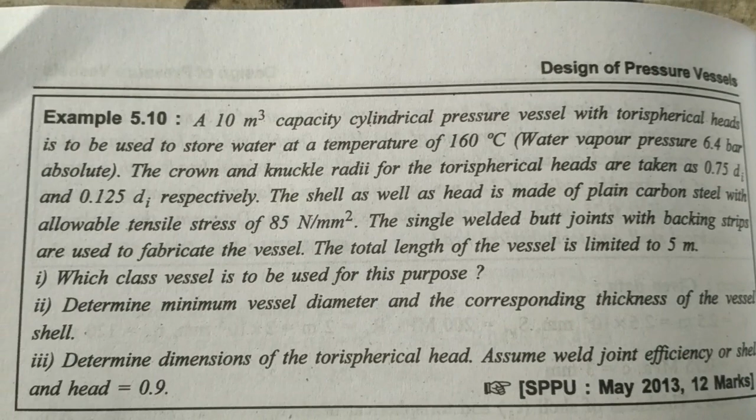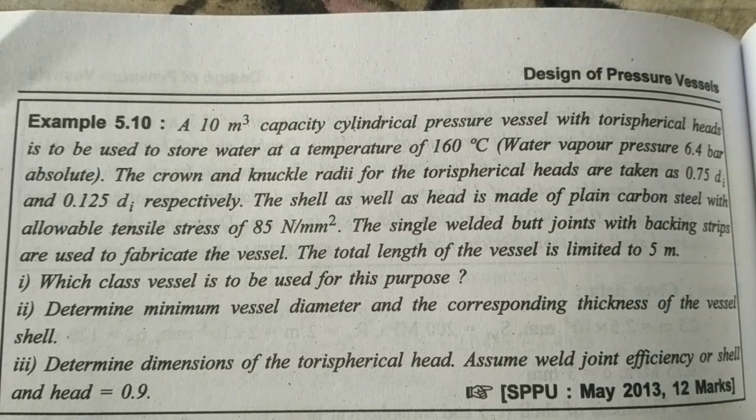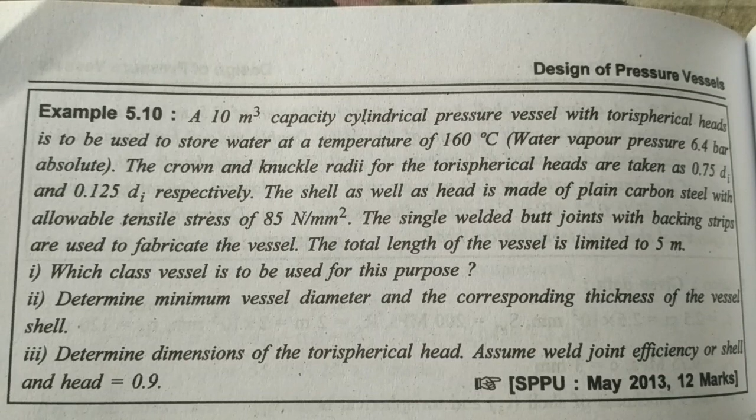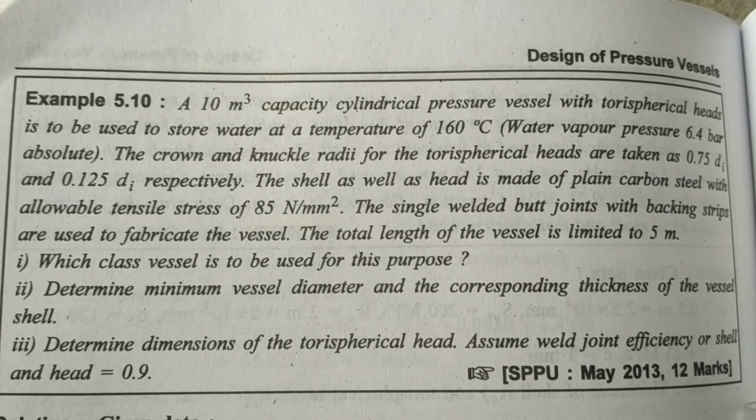The question: a 10 meter cube capacity cylindrical pressure vessel with torispherical heads is to be used to store water at temperature of 160 degrees Celsius. Water vapor pressure is 6.4 absolute bar. The crown and knuckle radii for the torispherical head are to be taken as 0.75 of internal diameter and 0.125 of internal diameter respectively. The shell as well as head is made of plain carbon steel with allowable tensile stress of 85 Newton per mm square. The single welded butt joint with the backing strip is used to fabricate the vessel. The total length of the vessel is limited to 5 meter.

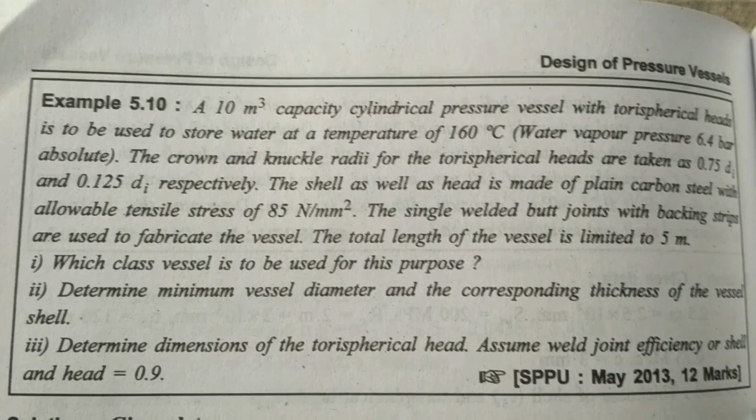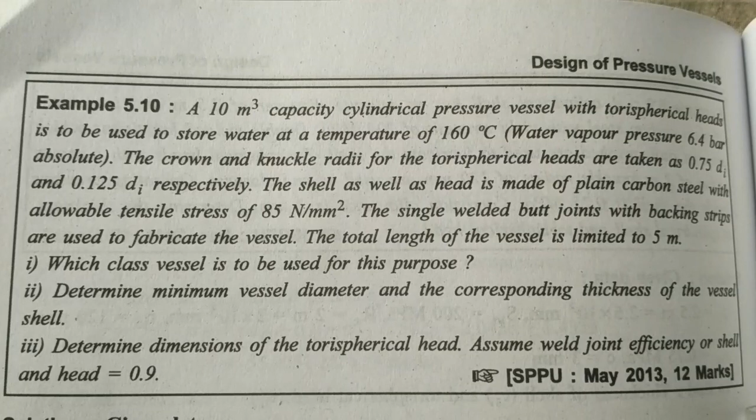Which class of vessel is to be used for this purpose? First, determine minimum vessel diameter and corresponding thickness of vessel shell. Second, determine dimension of the torispherical head. Assume weld joint efficiency for shell and head is equal to 0.9.

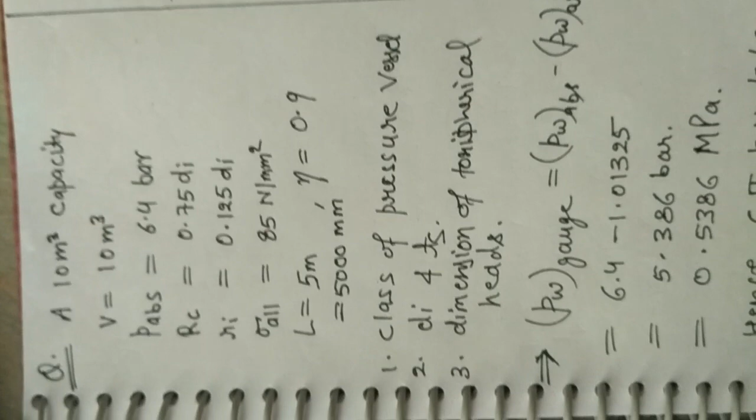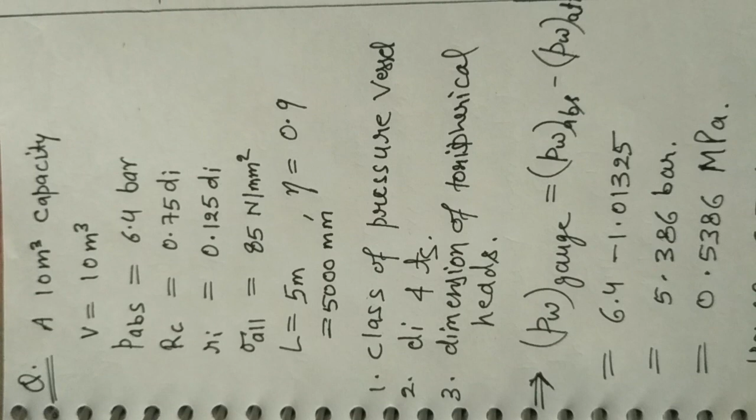This is the efficiency. So in this question, what are we given? A volume of 10 meter cube, absolute pressure of 6.4 bar, radius of torispherical head is 0.75 of internal diameter, and radius of knuckle is 0.125 of internal diameter. Allowable stress is 85 Newton per mm square, length is 5 meter, and efficiency is 0.9.

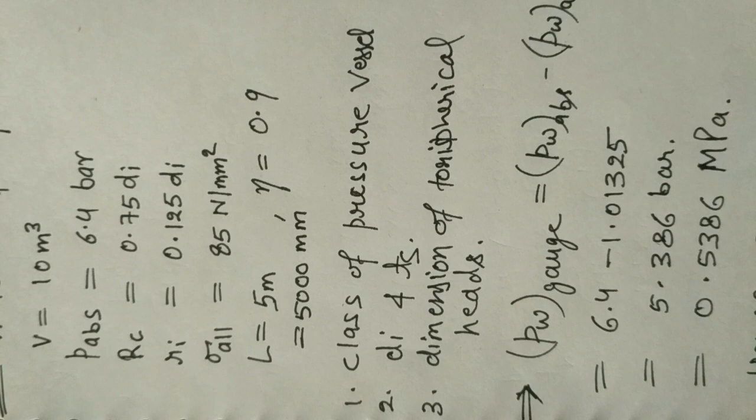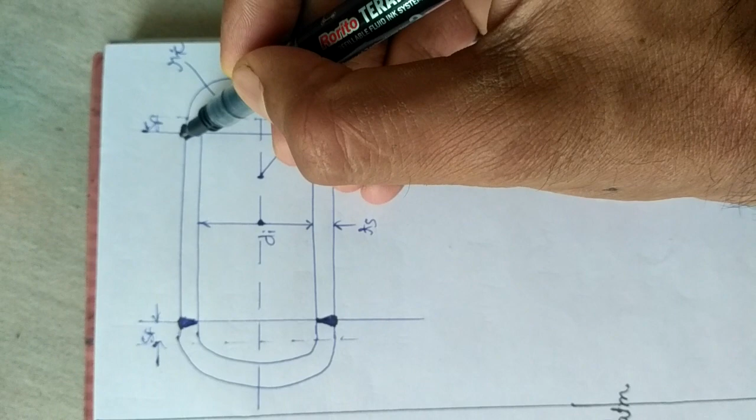So let's see, this would be the diameter, this would be the diagram here. These are dots, these dots are the joints with the back strip. This is the back strip here, on all the four joints. These are all the dimensions to be used: this is SF here, this is RIC, this is TS, this is RC, this is DI, this is TS, this is SF again.

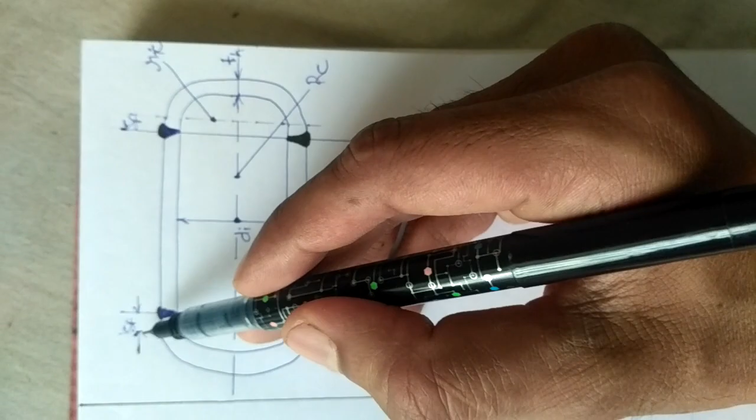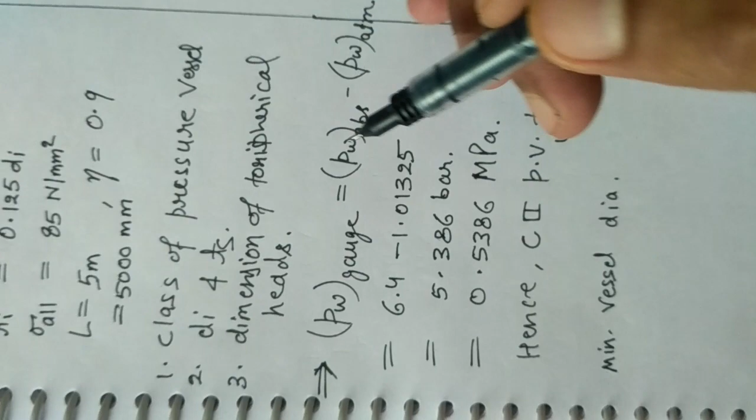So we have to find which class of pressure vessel to be used for this purpose. The first one, how can we solve it? Let's see.

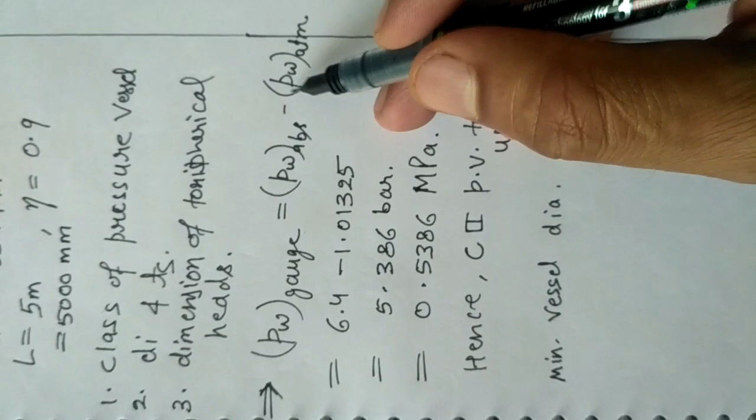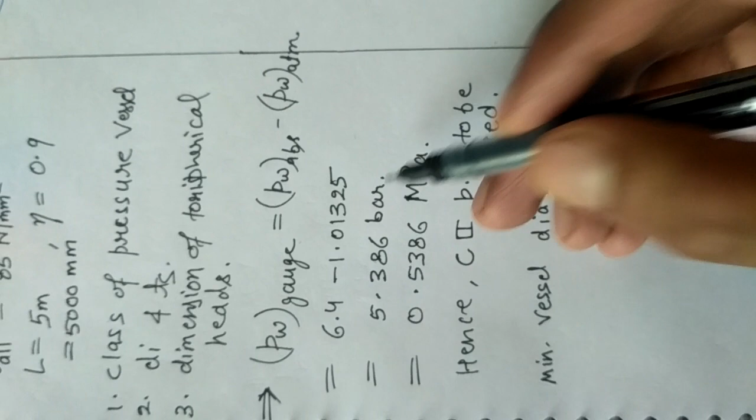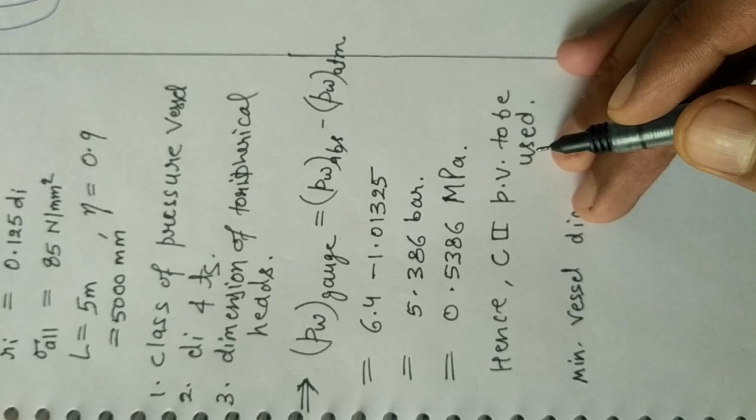The working gauge pressure is equal to working absolute pressure minus atmospheric pressure, equal to 6.4 given in the question, minus atmospheric, which equals 5.386 bar. Let's say it would be 0.5386 megapascal, and as this is below 3.25, we cannot use class third. There are no toxic materials to be used, and temperature is also greater than minus 20 degrees Celsius, so we have to use class second pressure vessel.

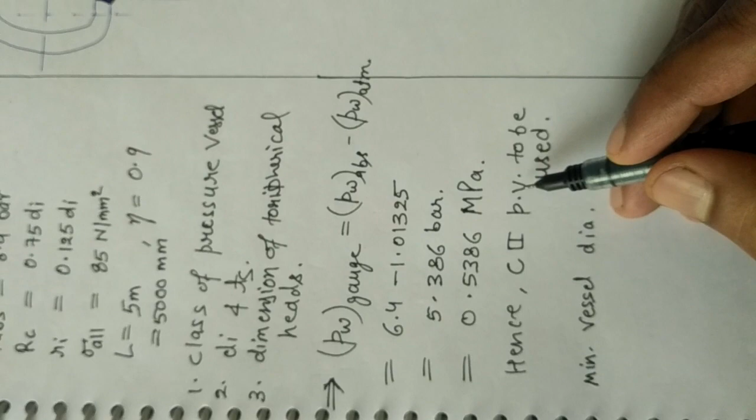This is the pressure vessel. So minimum vessel diameter AD is equal to CD minus CA, which is equal to CD minus under root of BC square minus AB square, from this diagram.

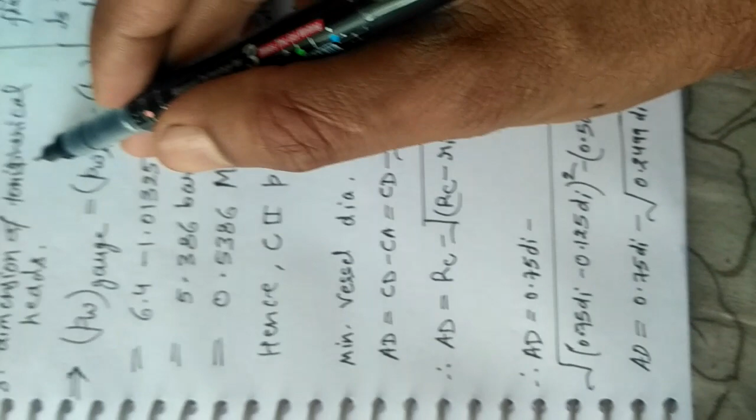And AD is equal to RC. RC is the torispherical head radius, minus under root of RC minus RIC, the knuckle radius, squared, minus DI upon 2 minus RIC, whole raised to 2.

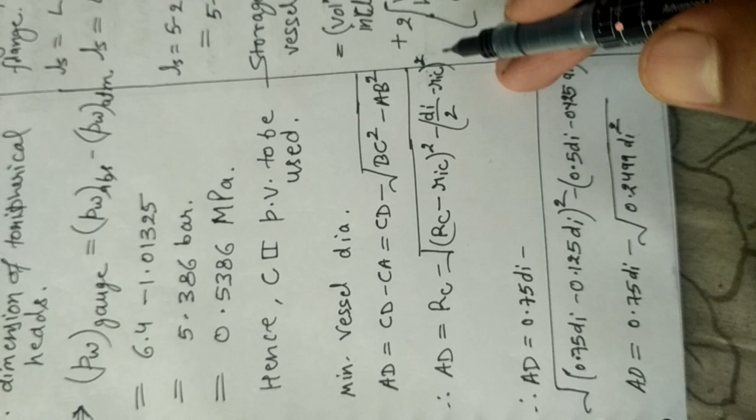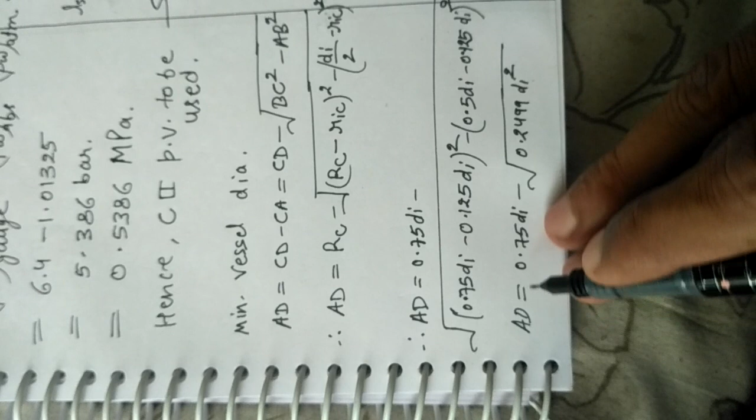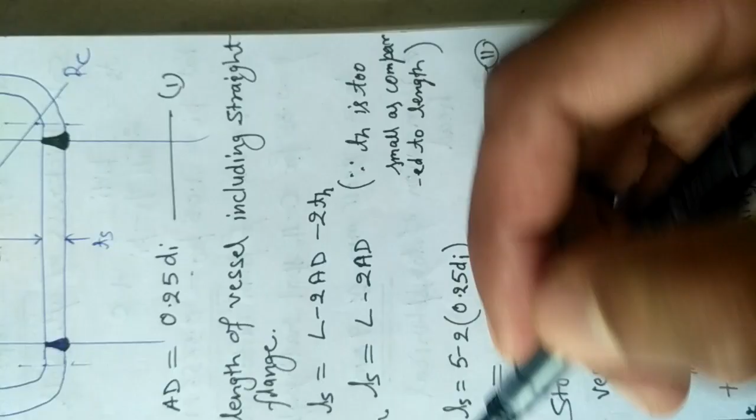So AD is equal to 0.75 di minus under root of 0.75 di minus 0.125 di whole bracket squared, minus 0.5 di minus 0.125 di whole squared. So AD is equal to 0.75 di minus 0.2499 di squared under root. So AD will be calculated from the previous equation as AD is equal to 0.25 di.

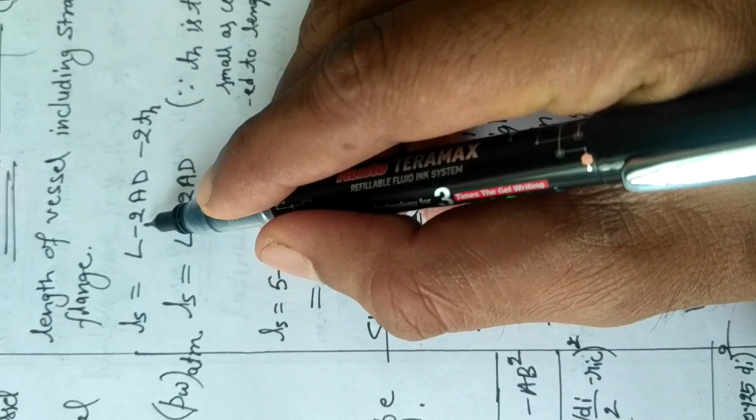Now, length of vessel including straight flange means this thing. Length of shell is equal to L minus 2AD minus 2TH. As TH is too small as compared to the length, this is TH, this portion, just this, and the length is this much.

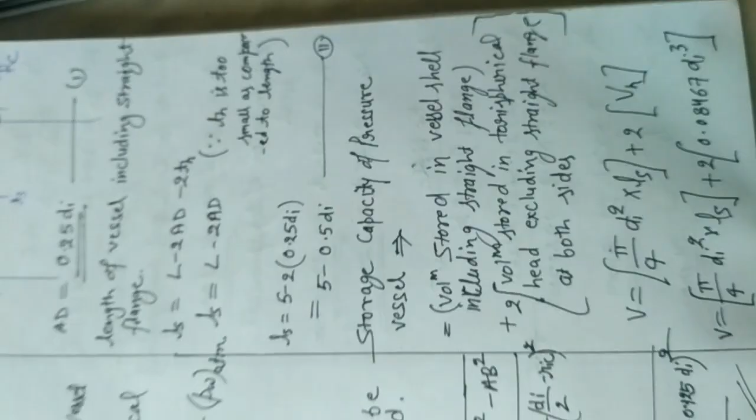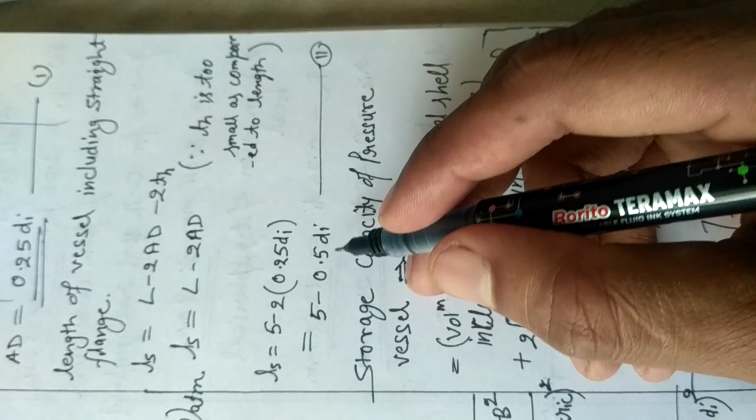Okay, so the TH is too small, so we are neglecting this, and so the shell length will be 5 minus 2 into 0.25 di is equal to 5 minus 0.5 di. So let's say this will be equation 2, and this was the first equation.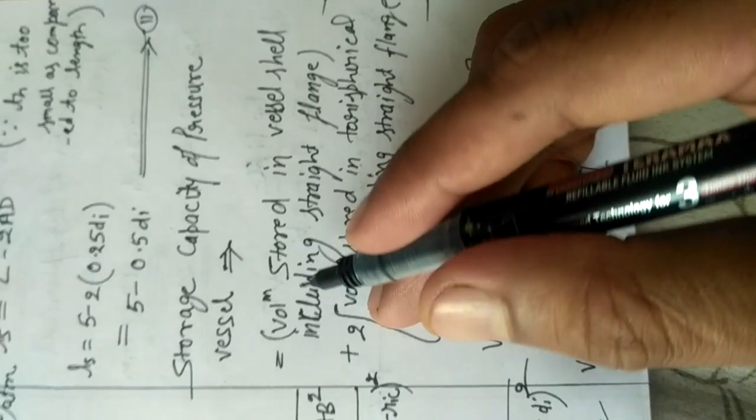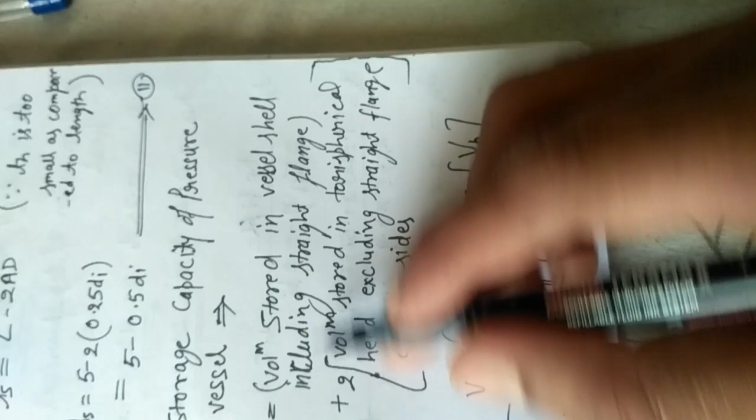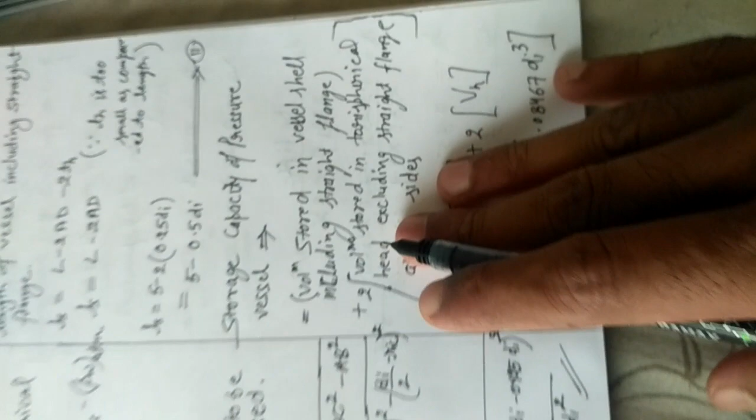The storage capacity of pressure vessel will be equal to volume stored in vessel shell including flange, straight flange from this portion to this portion, plus 2 into volume stored in torispherical head, excluding straight flange on both sides, from this side, from this portion to this portion.

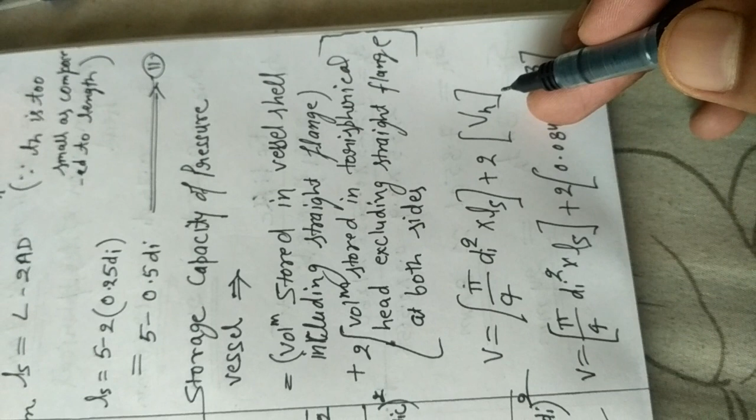V is equal to pi by 4 di square into ls plus 2 into vh. So this will be equal to pi by 4 di square into ls plus 2 into 0.08467 di raised to 3. So this will come as this.

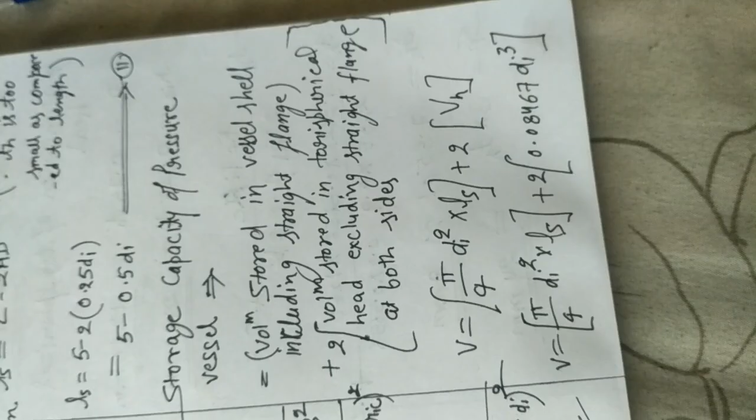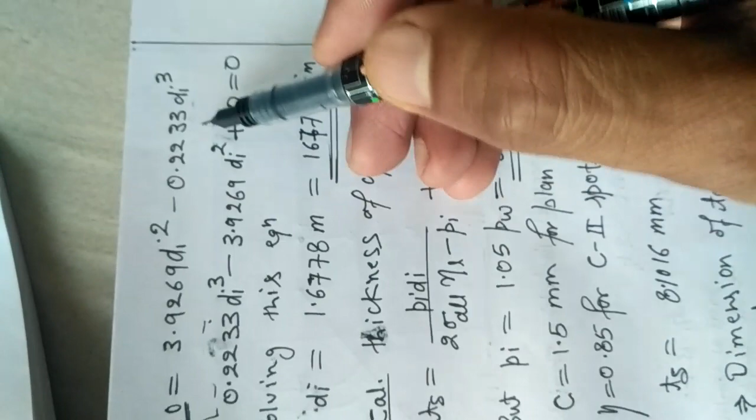The volume given is 10, and 3.9269 di square minus 0.2233 di cube. So this will be an equation from this to this.

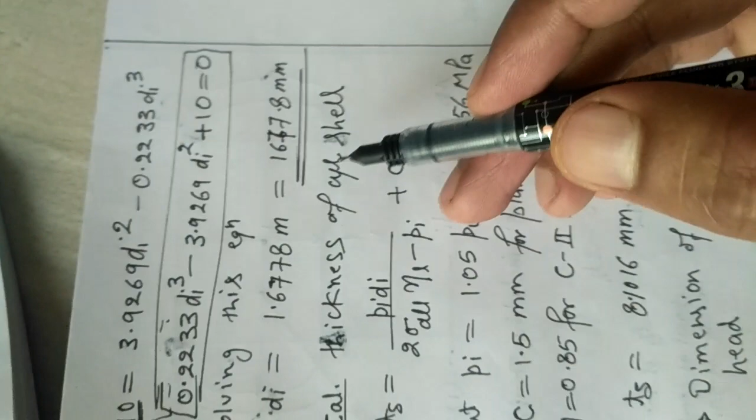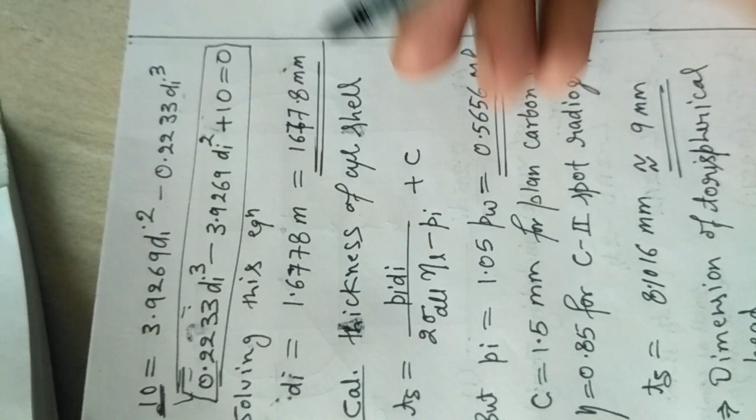This will be an equation. After solving this equation, we will get di is equal to 1.6778 meter, which is equivalent to 1677.8 mm. And as per the standard, we will take it as 1680 mm. This is the standard.

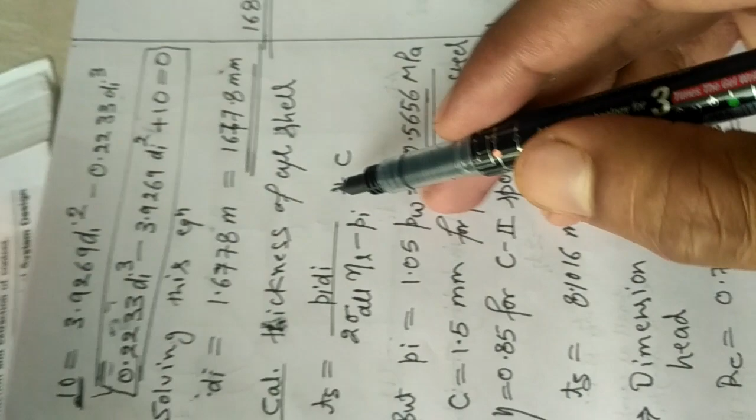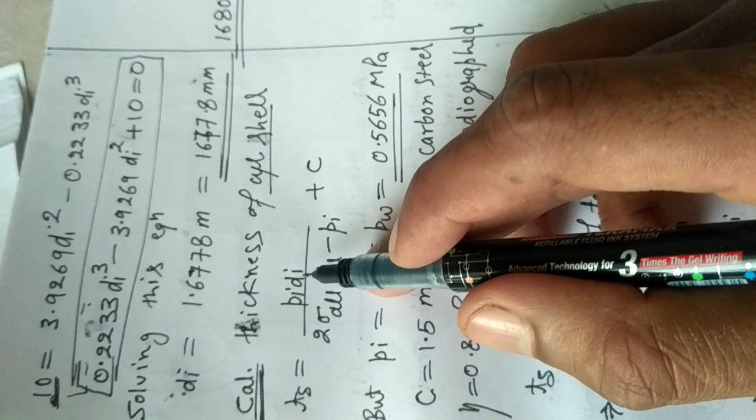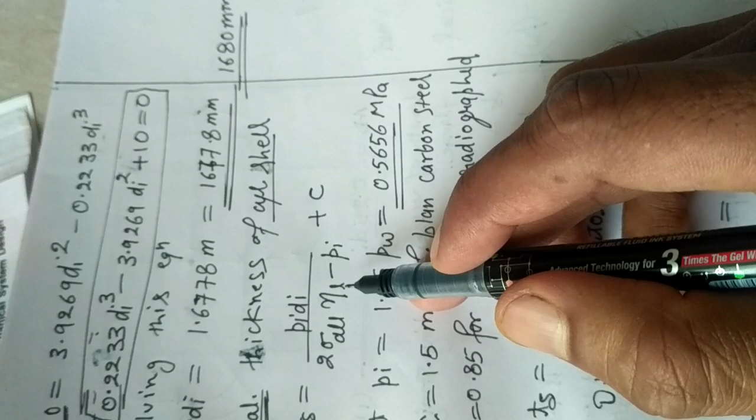Now we need to calculate thickness of cylinder shell, and the formula is: internal pressure into diameter of internal diameter, upon 2 into allowable stress efficiency, longitudinal efficiency, minus internal pressure, plus corrosion constant.

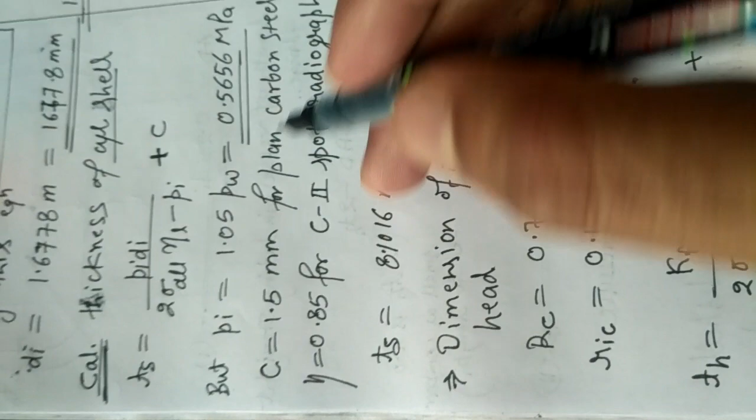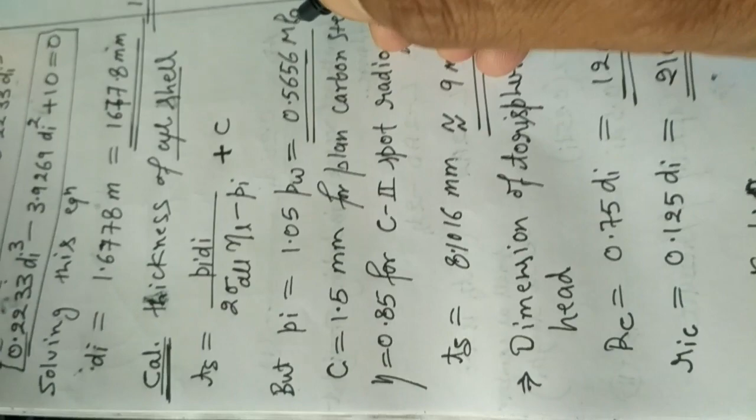The formula for pi (internal pressure) is equal to 1.05 into working pressure, which is equivalent to 0.5656 megapascal from the previous equation of working pressure, which was equal to 0.5386.

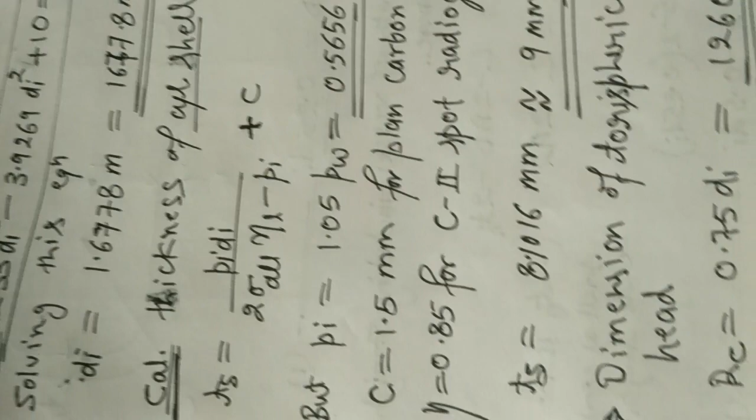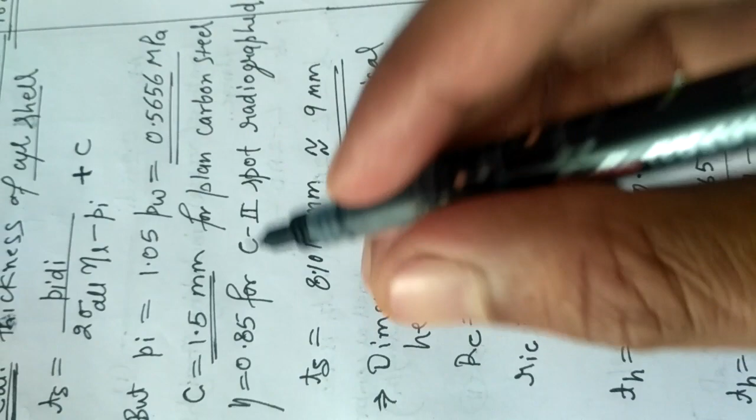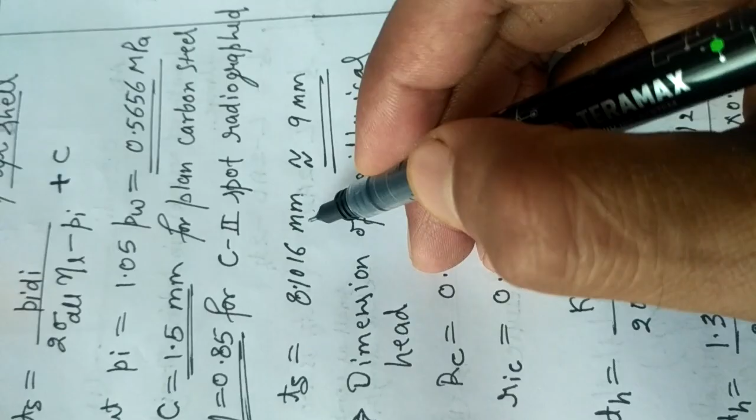Corrosion constant for the plain carbon steel is equal to 1.5 mm, and the efficiency for the class II spot radiographed is equal to 0.85. So the thickness of shell will be 8.1016 mm, which is equivalent to 9 mm from this formula. Once you put the value, you will get this 9 mm.

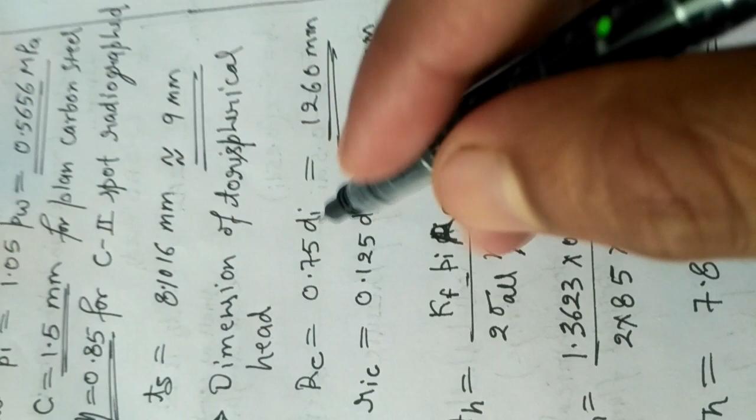Now we need to calculate the dimension of torus spherical head. The torus spherical radius is equal to 0.75 di, internal diameter is equal to, after putting the value of di, we will get this 1260 mm, and internal radius of knuckle is equal to

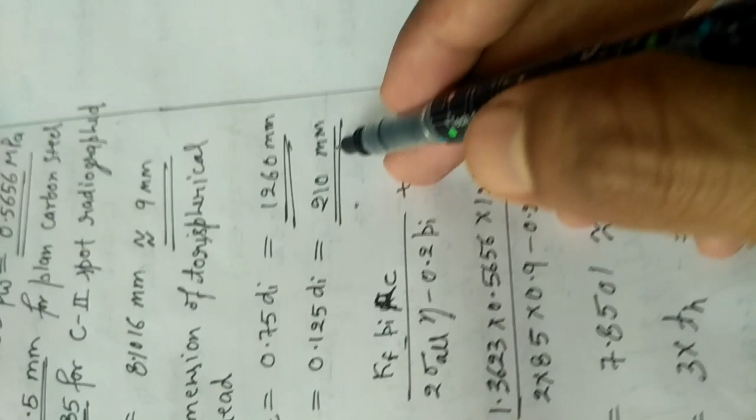0.125 di, which is given in the question. After putting the internal diameter, we'll get this 210 millimeter. Now th is equal to 1.3623.

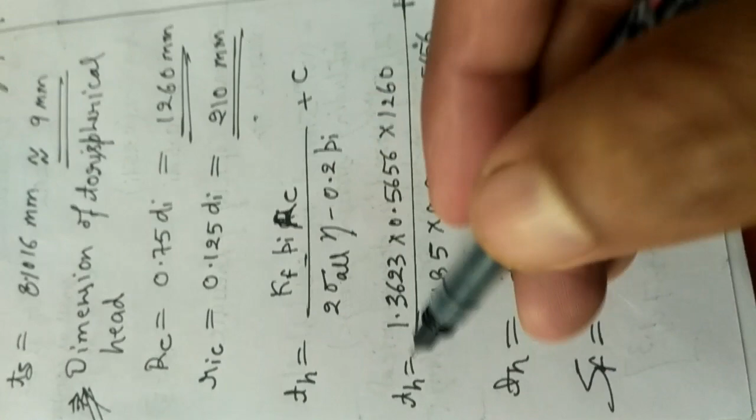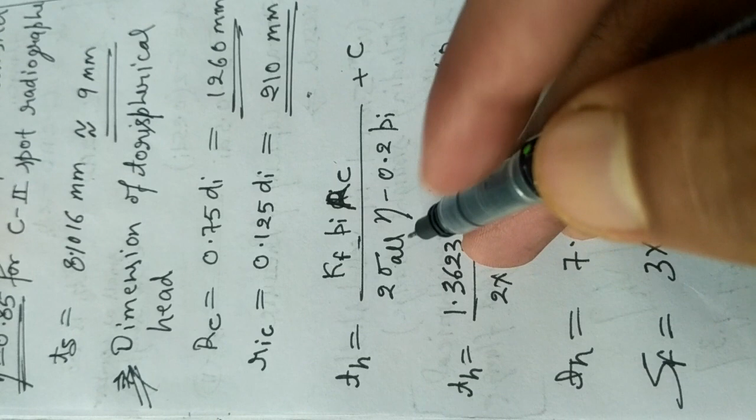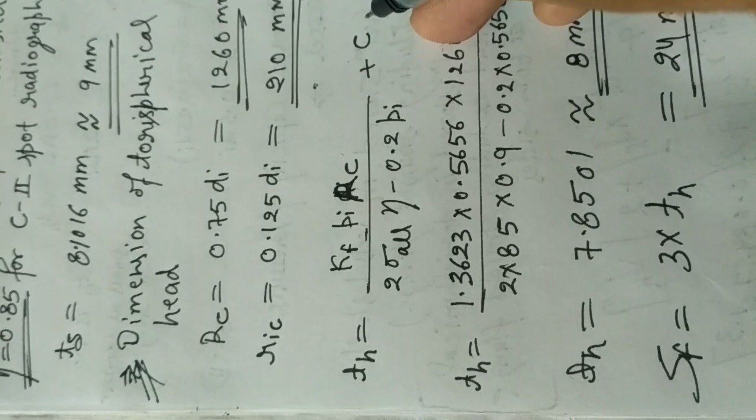So for th we have a formula: kf constant of friction, and internal pressure, radius of torus spherical head, 2 into sigma allowable stress, and efficiency that we have been given in the question, 0.9, and 0.2 internal pressure plus corrosion constant.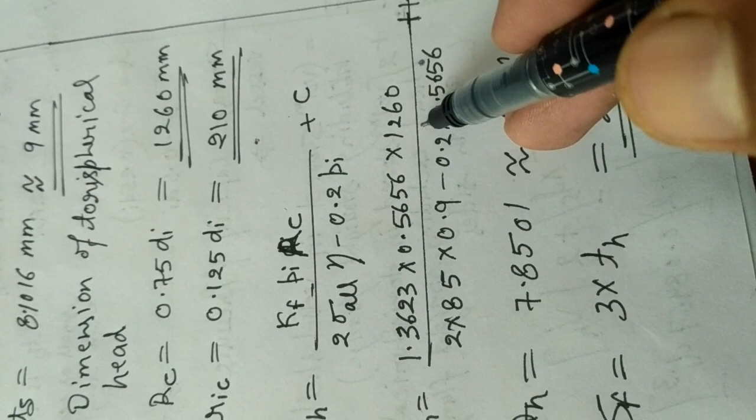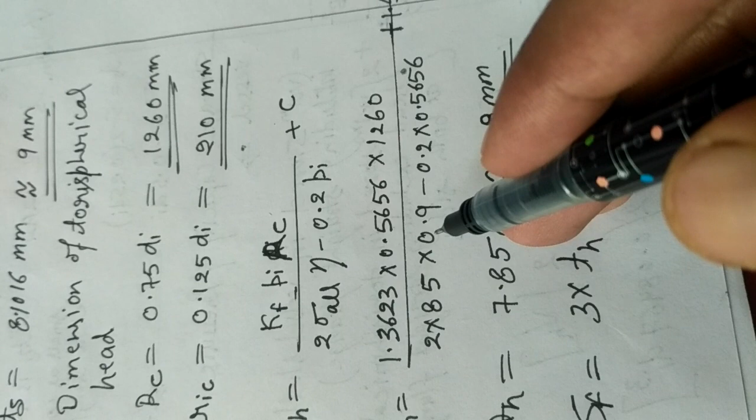So this will be 1.3623 into the internal pressure 0.5656 into RC, which we have calculated over there, which is 1260, 2 into 85. 85 is the allowable stress, and 0.9 is the efficiency given in the question, and 0.2 into 0.5656 plus 1.5, which is C for the plain carbon steel.

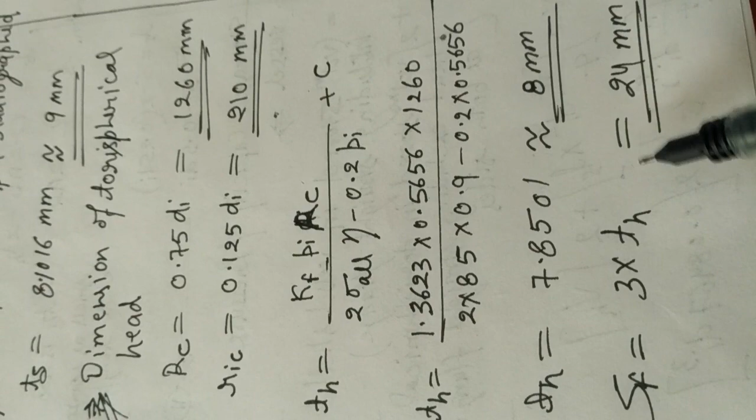So TH will be 7.8501, which is equivalent to 8 mm, and SF for this will be counted as 3 into TH or 20, whichever is maximum. In this case the maximum will be 24, so this is the SF.